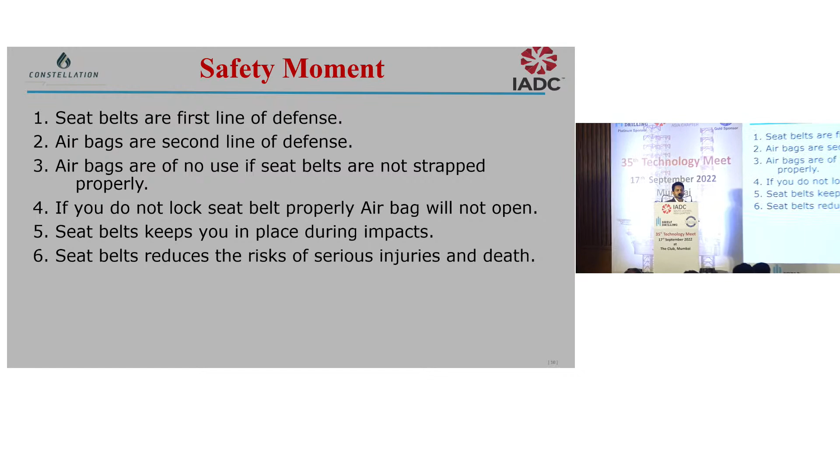Today's safety moment is use of rear seat belts in cars. I think this is current affairs nowadays, and this is a very important lesson also. So these are a few safety points. Safety belts are the first line of defense. This is very important. If you don't wear your seat belt, your airbags will not operate. So we have to always wear our rear seat belts also. That is more important.

If you do not lock it properly, your airbag will not operate. Most importantly, seat belts keep you in place during impacts. We all know the importance of seat belts now, but still we are hesitant to wear it. We have to make it a practice every day, like safety. Seat belts reduce the risk of serious injuries and deaths. There are a few videos also.

What happens in case of a collision, rear seat passengers are thrown at a force of 40 gravity, meaning 40 times the weight. If your weight is 80 kgs, it is almost 3200 kgs of weight. So you can imagine the hit.

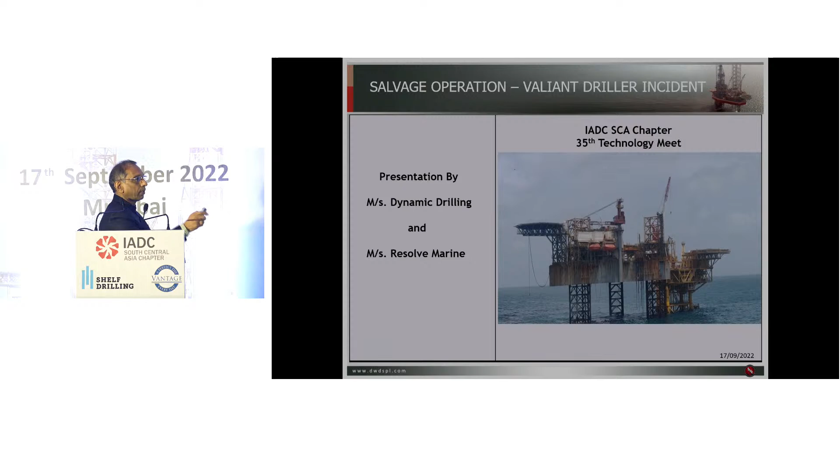Can I try from here or you can do that? Yeah, I'll go fast.

We got the warning of Cyclone Tauktae issued to the rig on 12th May 2021, and we took all the safety precautions to avoid these cyclonic adversities and keep the safety of our life as well as the asset.

Let me come straight to the 16th of May. The rig Valiant Driller continued working at N24 platform with the installation of Christmas tree up to 17:30 hours in the evening. We secured all the setback load on the derrick, equally distributed on the starboard and port side. The design derrick setback is 600 kips of setback load at 100 knots. We secured the rig floor, pressurized the gripper to 5000 psi, tightened all the bolts of tie-down clamps at the torque of 1200 foot-pound, and skidded the entire cantilever fully inside in a storm survival position. We secured everything in a safe mode and suspended our work.

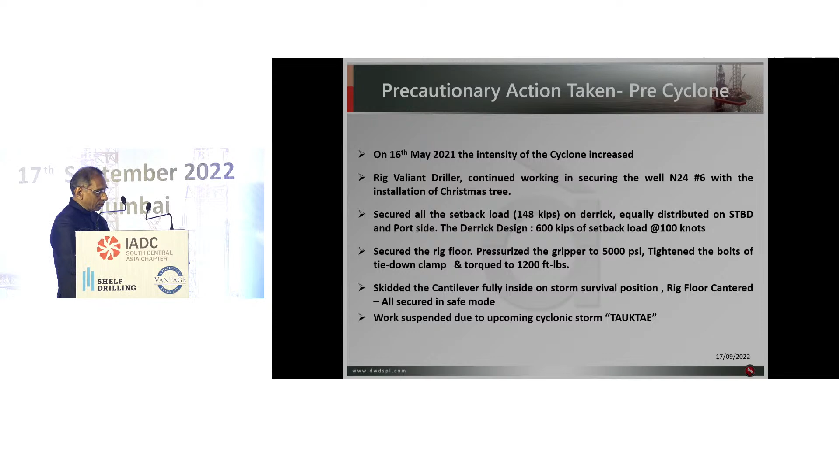17th May: the cyclone path changed towards the rig location with rapidly increasing wind speed intensity. At 10:30 hours the weather worsened. We reported wind speed of 100 to 105 knots, gusting to 120 knots, and swell of 9 to 10 meters. Everything happened in a very wrong way at 15:30 hours. The wind speed tremendously increased to 120 to 130 knots at a direction of 210 degrees. The sustained gust was plus 150 in a circulation direction, in a vortex effect, and such continuous gusting was not witnessed in the last 50 years.

The rig Valiant Driller got caught in the eye of the super cyclone, I can say, and the derrick structure, the transfer section, the rig floor, all the equipment -- it broke down the skid beam, which we had actually secured, and it fell down into the sea on the starboard side. Thanks to God, 62 personnel on board were safe. They mustered inside the accommodation.

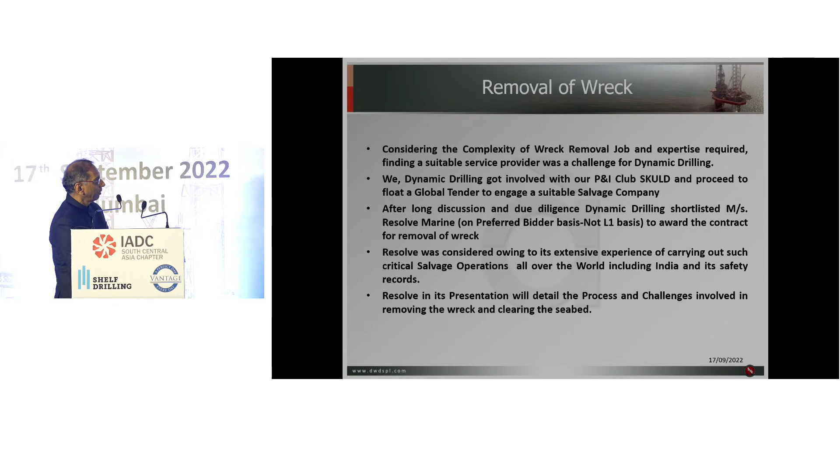Let me come to the last slide. Since my co-presenter Mr. Bagga is here, he will go through all those slides and presentations plus some videos. But before that, let me thank everybody. The project could not have been achieved without the full support and absolute cooperation from ONGC at all levels, including the MDT team -- we are very grateful for that. And there was excellent cooperation and support, and understanding, between Dynamic as well as Resolve during the entire wreck removal project.

We would also like to thank Resolve Marine for its efforts, and they agreed to present this case study here in this forum. Mr. Bagga has come from the US, and he was actively involved during the project, and he is heading the Resolve operation. I welcome Mr. Bagga, please.

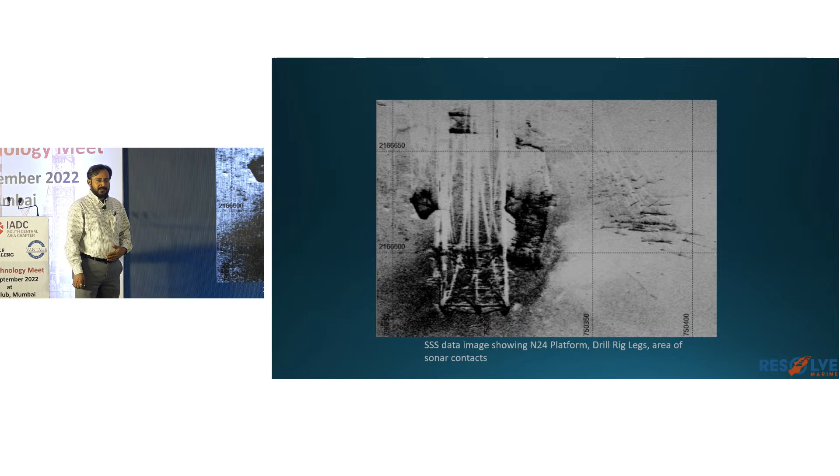So this is how the pictures were given to us. You can imagine this is the basis on which we had to start doing the salvage work. These are the three legs of the Valiant Driller, and this is the debris field, and this is the area where you have the N24 platform. Based on this sketch, our engineers were involved and came up with how it probably should look.

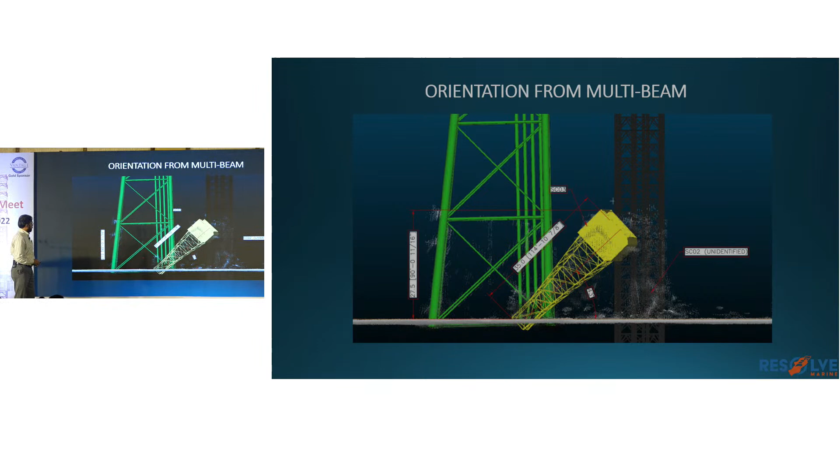Then we developed scenarios. One scenario was that part of it is embedded down into the mud seabed, and the other scenario, since the pictures and data were not very clear, was that it is probably broken into two like this. So we had scenario 1 and scenario 2, but we did not know for certain if this was exactly the situation.

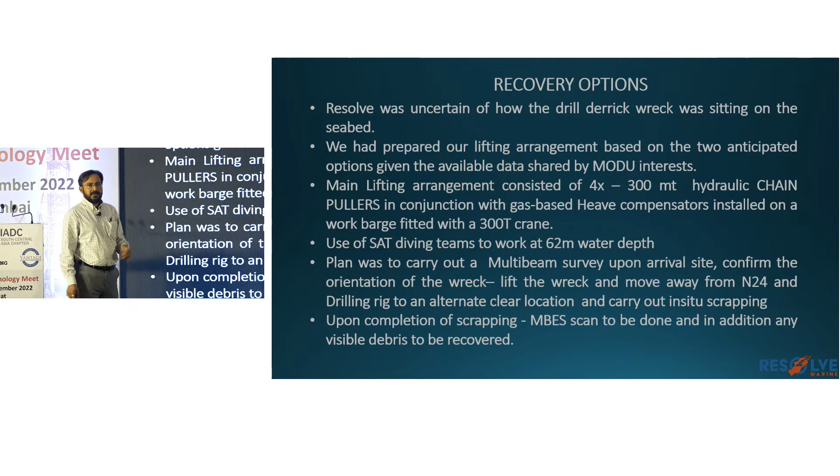We prepared our lifting arrangements based on the two anticipated options, scenario 1 and scenario 2. The main lifting arrangement was 4 into 300 metric ton hydraulic chain pullers, used in conjunction with gas-based heave compensators, which we will come back to later. This barge was also equipped with a 300-ton crane, and given the depth, we had to use saturation divers.

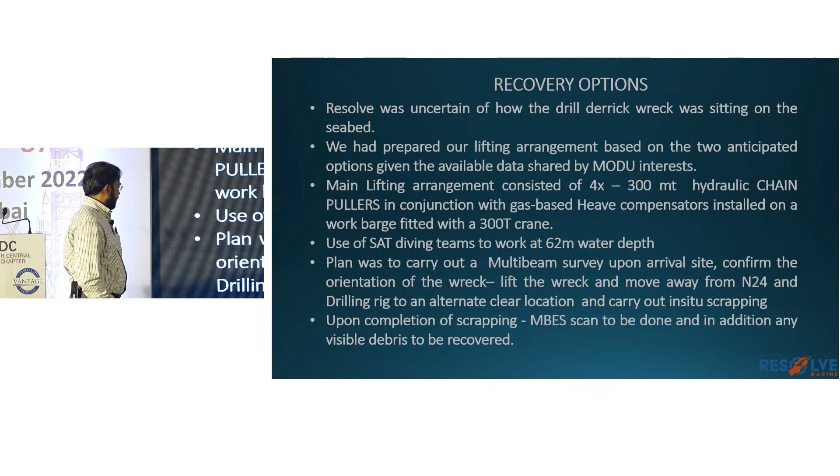If you work in these fields all the time, you know that visibility is a very big challenge on the west coast of India. So our idea was to do a multi-beam survey to find out the exact location and orientation of the wreck, and then proceed from there.

And depending on how we are lifting it, which chain needs to come up more, which area is heavier, which needs more support - all this can be organized based on the computers we use to operate all these chain pullers. Then there is a manual mode where you don't need all these hi-fi computers, and we can do completely manual.

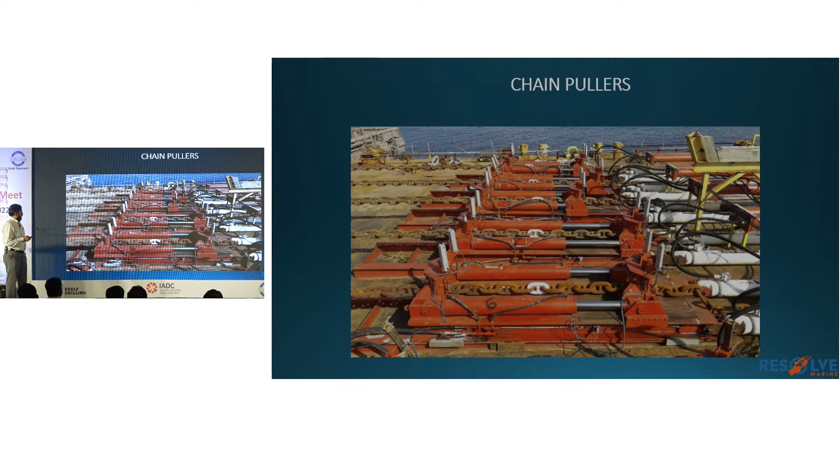This was the kind of lifting arrangement which we had planned for - that we would be lifting it, bringing it up using chain pullers and using the crane.

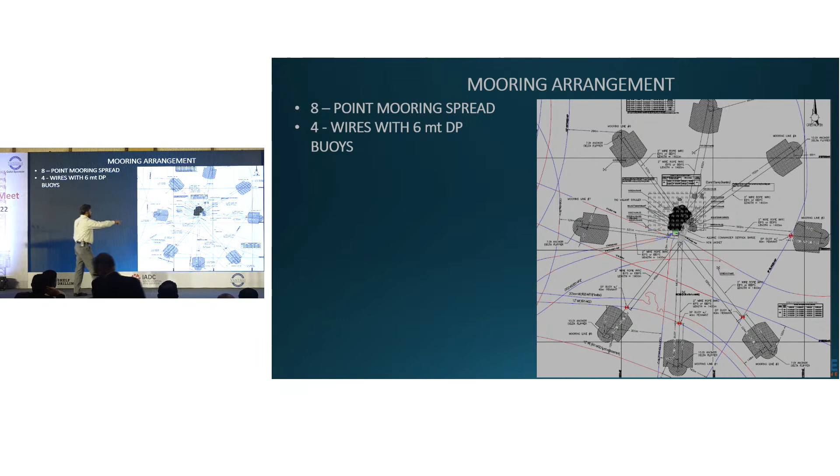And this is where the reality was - we got this mooring arrangement done, and you know better than me that all these red pipelines means naked pipelines. There is no, you can't touch them, you can't go near them, you have a serious problem. So this is the field we were supposed to be working in, and you see that area where you have N24 platform, and this is the debris field nearby.

This is how we had anticipated that we will be using 4 chain pullers along with the heave compensators. Along with our sat diving equipment and all that stuff, these are the pictures when the mobilization of the barge was being done in Abu Dhabi.

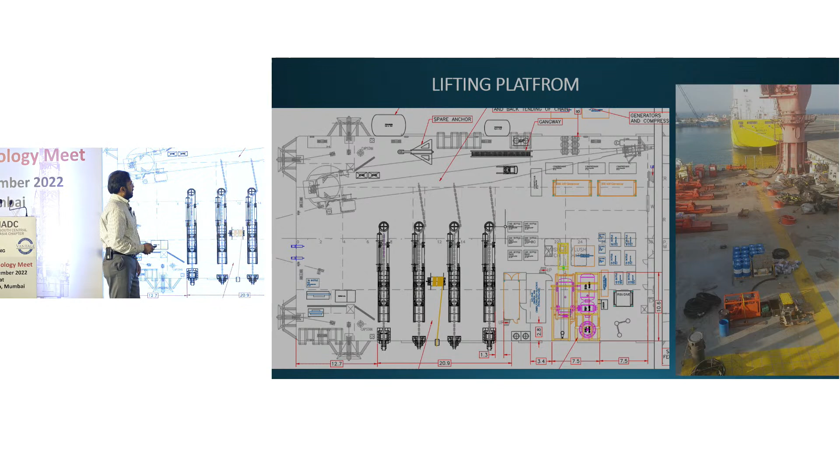Our marine spread comprised of a customized crane barge, 2 tugs, crew boats, material barge, and additional support vessels. We arrived in Mumbai in Feb 2022, this year. Our salvage team was an international team comprised of people from USA, UK, and you name it. We are an international company, so we call upon all of our talent whenever and wherever it is needed.

We had chain pullers, heave compensators, hot tap equipment. Hot tap equipment, if some of you may not know, is something we use to actually go in and remove the fuel or lubricants from the tanks, so that there is no pollution. And we had remotely controlled hydraulic saws, which we had flown in from Houston. They can go and cut the thing on their own. The idea being that you don't want stresses in the system - you don't want a diver to cut a particular item which is under tension or stress. It has a tendency to spring back and hurt the diver. So all these things were done.

And what happened when we were actually mobilizing - an Omicron variant hit at the mobilization stage. UAE and the Middle East shut down. India was very worried. All over the world, everyone was worried because of this new variant. Luckily, this turned out to be a minor variety, but we were under tremendous stress because we were mobilizing for the job and this problem started.

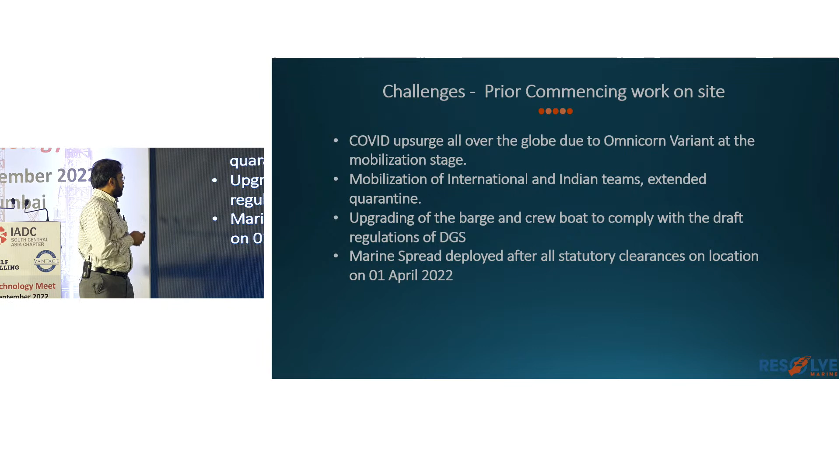And then, of course, when we came in here, there were some draft DGS regulations which came about and which we had to implement. We did that, and after all the statutory clearances - thanks to ONGC and everybody who was involved in helping us get those - our barge and the convoy went on the scene on 1st April.

So when we arrive on site, what do we find? We find that the orientation of the wreck is now different - it is not what we had anticipated and planned for. The wreck has broken into 3 pieces. We were thinking it might be folded over and we could still pick it up, but now the wreck's 3 pieces are at different locations. This was very challenging - the base section, weighing close to 240 metric tons, is lying approximately 1 meter away from the leg of N24 platform. This was a very, very challenging thing for us.

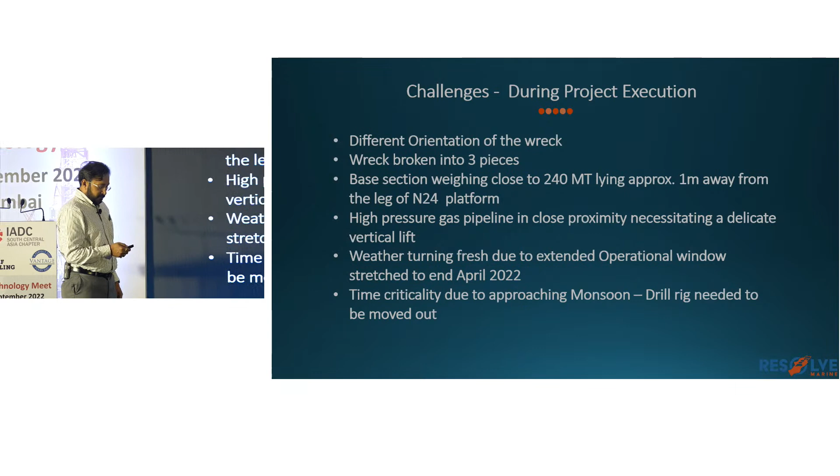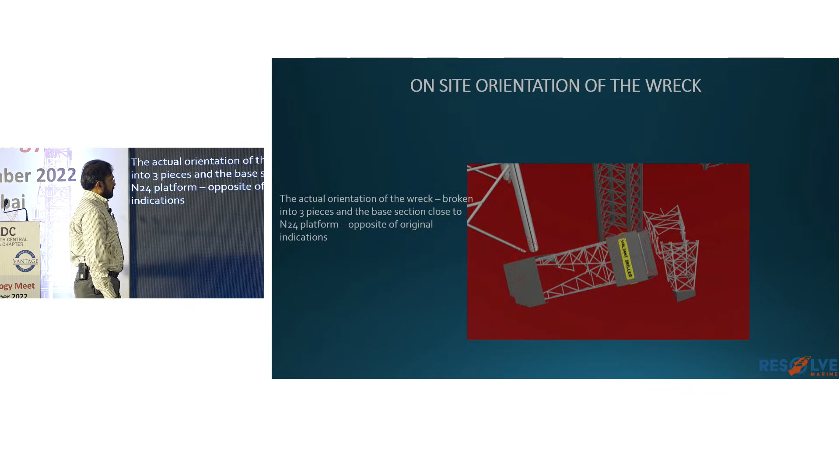And this is when our team came and they saw this. This is how the rig and the platform was sitting. This is what our engineers, after the survey, estimated how the thing is sitting. And these are the 3 pieces, and this is the base section here. This is the main one.

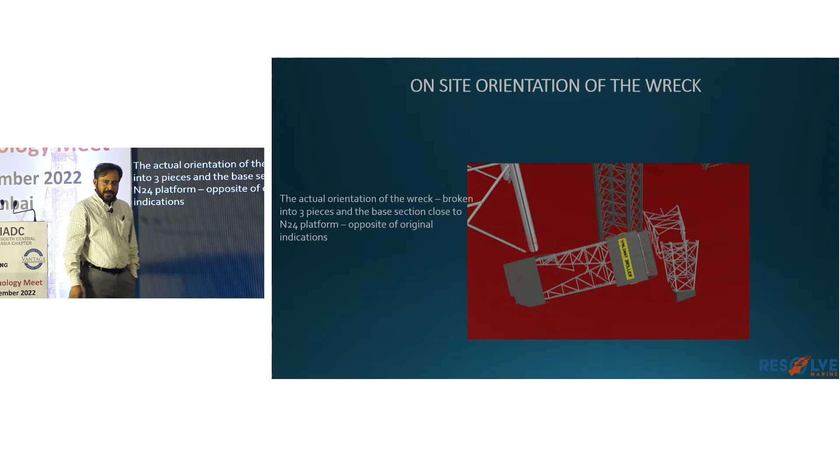This was opposite of the original thing we had actually been given. So we had to go back to the drawing board right there and then and come up with a plan for what we need to do.

So you can see this is a schematic diagram, how the sections are sitting next to the N24 platform. You can see that if you're looking from the top, you can't make out that there is any gap. But we knew that there is a very, very minor gap, about a meter between the leg. Very lucky that N24 got unscathed from this one.

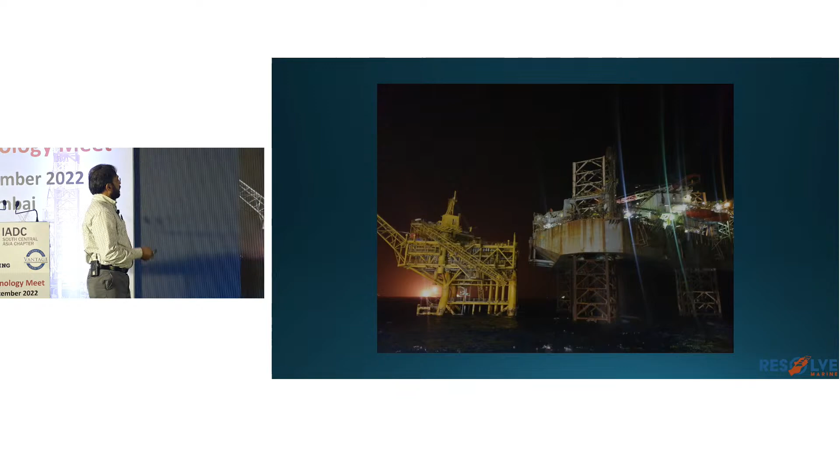This is the pictures, okay. This is our guys down below actually checking. This is how it looks like. And these are the 4. This is how close the barge is. You can see this is the Vantage driller N24 and the barge.

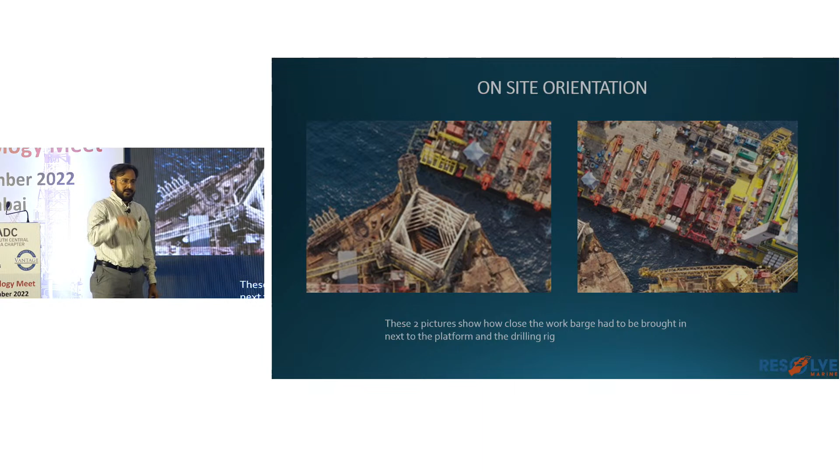This is, you can see how close we were there. These 2 pictures represent how close we had to go in because we had to go for a vertical lift. And that means we could not grab onto it and move it because of the oil pipe, this high pressure gas pipeline, which was very critical.

And I can tell you, we spent a lot of sleepless nights at that particular moment. And we had, courtesy ONGC's cooperation with them, kept the well alive for most of the time, except during that particular lift, which was for about 8 hours. The drilling rig was about 17 feet.

We were about 5 meters away, and we actually closed the well for approximately 8 hours, and the lift was successful. So this is a small video which shows you how the divers were going, carrying out a dry run.

This is what a bell looks like. Maybe most of you have seen that.

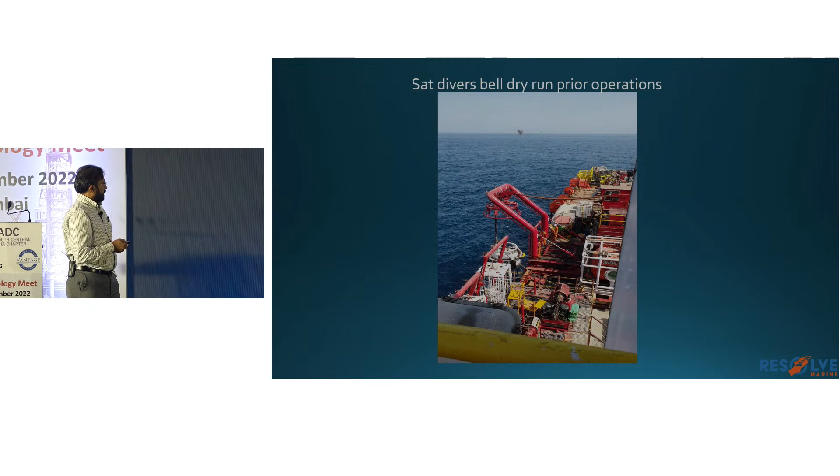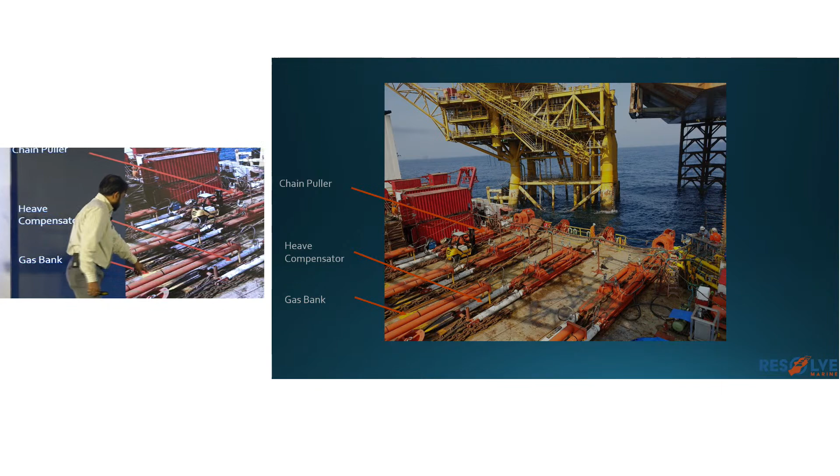If you see, the interesting thing here is this chain puller actually slides on this frame. There is a frame there. The chain puller moves on the frame, and the chain puller is hooked on at the back with these heave compensators, so the whole assembly is actually sliding on the frame. These heave compensators are in turn, this is called a whelp, where the heave compensators have wires hooked onto a fixed point.

So let me see if we can show you the video. You can see here, these heave compensators with a wire are connected here. These are the gas banks.

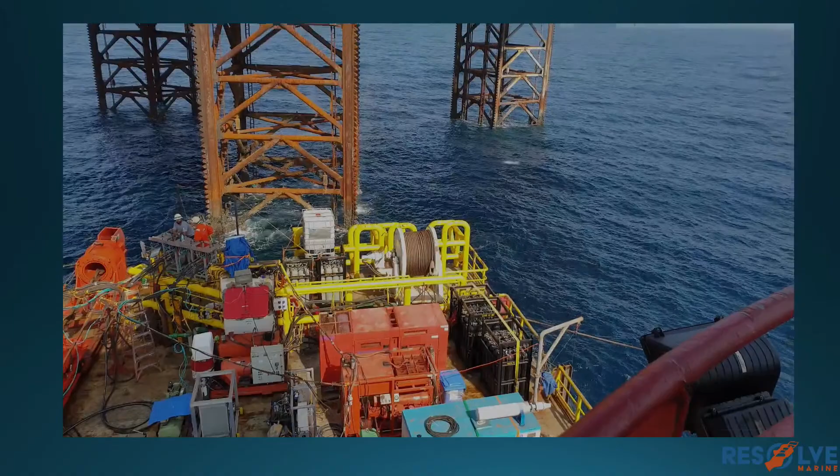I will actually show you a better quality video. Let's move on to this. This is a chain puller, how the chain puller works. Let's see if we can show this video.

These are the heave compensators. You can see they have been extended, and they actually move along with the swell of the barge. So this is moving on quickly, partially buried.

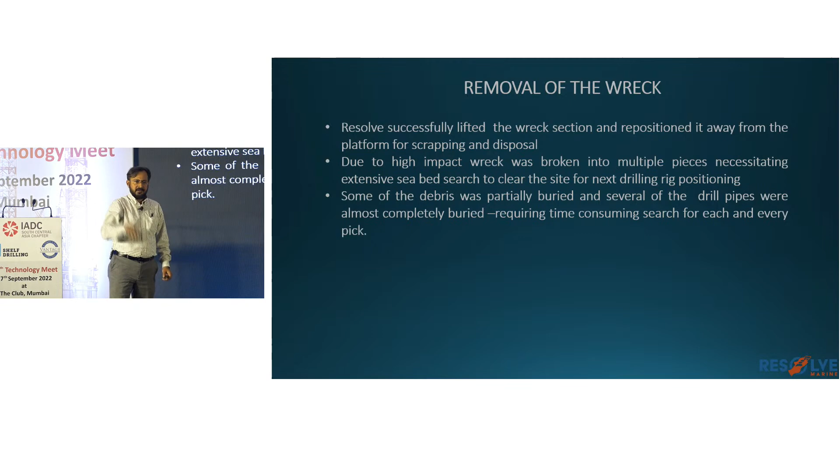The pipes were like darts in a dartboard in a different area. So we'll just quickly show you this video. Again, I don't think the video is very good for some reason, but this is how we are picking up.

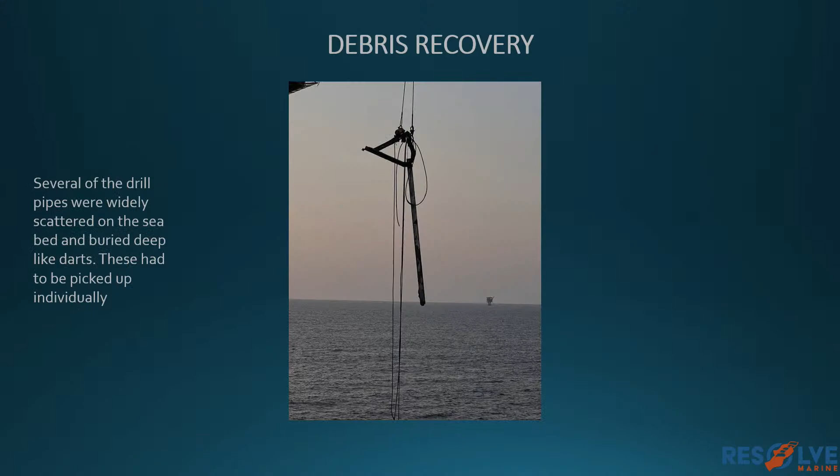We had to actually go and individually pick each and every pipe, and that was time consuming. Visibility was poor, divers had to go and look for everything. Some of these things cannot be picked up by ROVs, so we had to do this visually.

This is how we maintained how much weight we have picked up, what we did. This is a grid we prepared. So this is the Valiant driller, the triangle, 3 legs, and you can see this is the process what we are trying to show you.

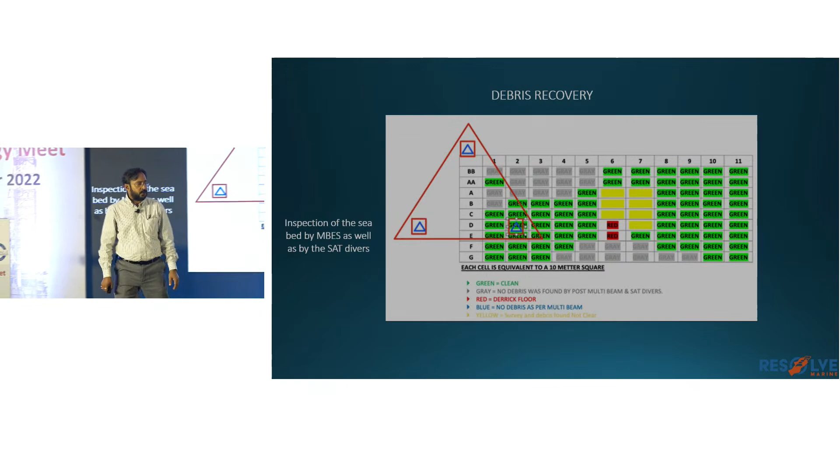Green means it is clean, we have done whatever we needed to do, and gray means we did search with the divers and we did search with the MBES, nothing was found. Red is the one which is derrick floor. Blue means no debris, but still we have to look. Yellow means survey and debris found, not yet clear. Each grid was 10 meters square, so this was a methodical way of going about making sure that everything is clean.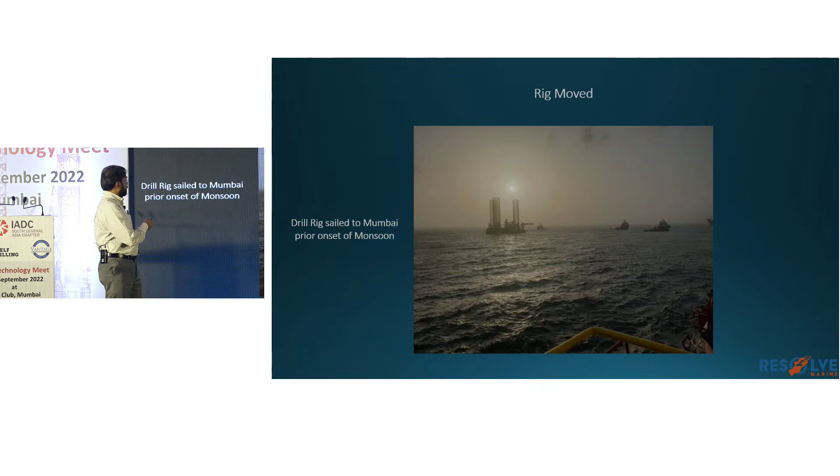One of the things I started with in the beginning, and I want to emphasize it, we are a foreign company, we came here to do work. We would not have succeeded in this endeavor had it not been for excellent cooperation from ONGC, right from the bottom to the top, everybody. I must thank you from my heart for what you guys have done for us.

The important thing was everybody had a belief, yes it can be done, it will be done. There were so many challenging moments, but everybody kept calm. Nobody put pressure on us, and we actually did it. There was a little bit of delay because of the weather, but it happened.

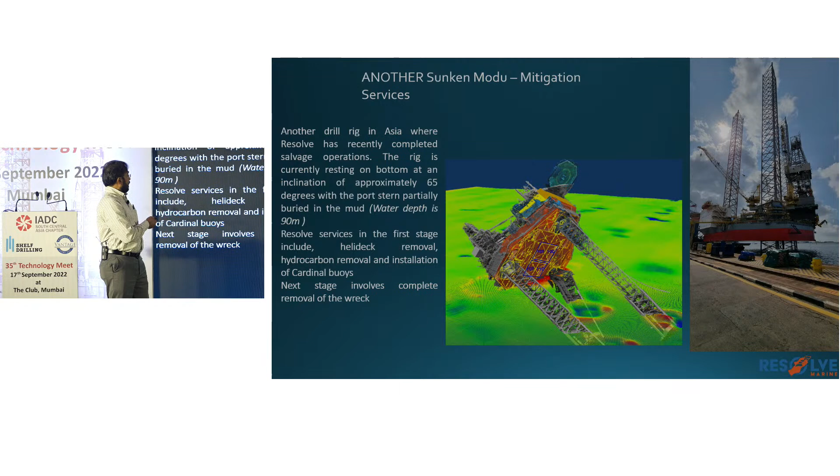So let me show you now, this is another one, I have just finished this. We're just coming back from there. This is another MODU, and we have done the helideck removal and the fuel removal from the tanks. You can see the tanks here. This is how another one, MODU, looks like. Yes, it punched through, and it toppled and went over. It's about a 6-year-old MODU.

So we are now working on it, we just finished part 1.

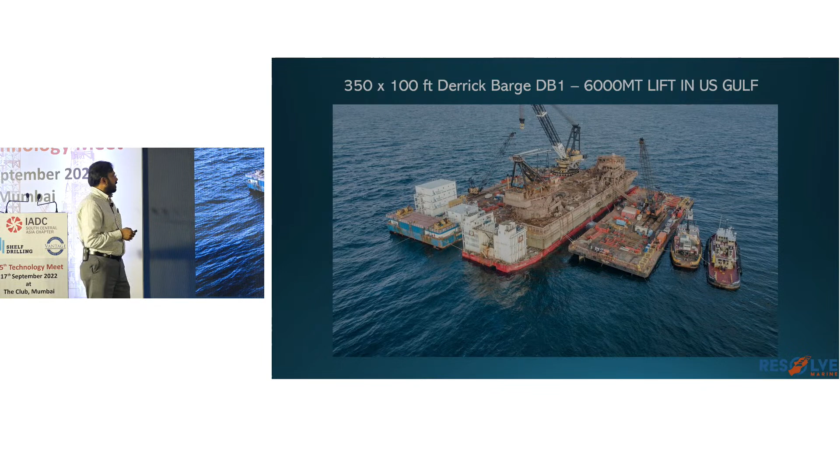And this is what I wanted to show you. This tells you, actually this is a better quality video, how a chain puller system with heave compensator works. It's not related to this project, but it gives you an insight on how the system works. So this is a derrick barge. If you see the complete one, this is a 6,000 metric ton lift, the highest lifted in the United States Gulf, which Resolve did.

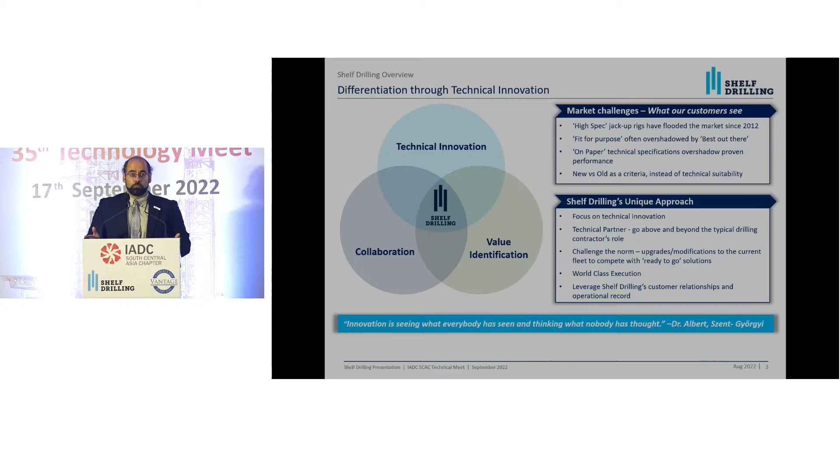Eventually, a lot of the operators, especially those not truly aligned with what they're trying to achieve, started going for what's the best out there, instead of what is actually fit for purpose for their operation. Technical specifications that looked great on paper started overshadowing proven performance. A lot of operators started giving contracts to new drillers who had never drilled before but had the latest rig right out of the shipyard, versus people who actually knew what they were doing. New versus old also became a criteria - we saw different people around the world introducing age limits, a lot of which did not make sense for their actual operation.

So there's two ways to fight these problems. One is you join the problem and start ordering new rigs. The other is to actually take a step back and think about what we're trying to do. Our goal is to drill wells - sometimes to erect platforms, sometimes to abandon those platforms - but that's the key role we play in the value chain. If we can focus on technical innovation with existing assets and go above and beyond just being a drilling contractor on a day rate trying to do the best possible and then leave - if we can truly become a technical partner, understand what our customers and operators really want to achieve, and help them find solutions to those problems - that will become a differentiator for us.

So today I'll give two examples of such technical innovations that we've come up with in the last few years to really help key operators solve particular problems they had.

The first one is in the Gulf of Thailand. Some of you may know that in Thailand, the well economics are very short cycle - wells only flow for a couple of years. So you have to drill very fast, and then you end up with a whole bunch of wells and platforms that need to be P&A'd, or asset retirement as they call it. A lot of the operators there have commitments to the government - since they are drilling sometimes 500, 600, 700 wells in a year, that adds up really quickly. By the end of the concession, they need to retire all those assets - that's part of the commitment of getting the concession.

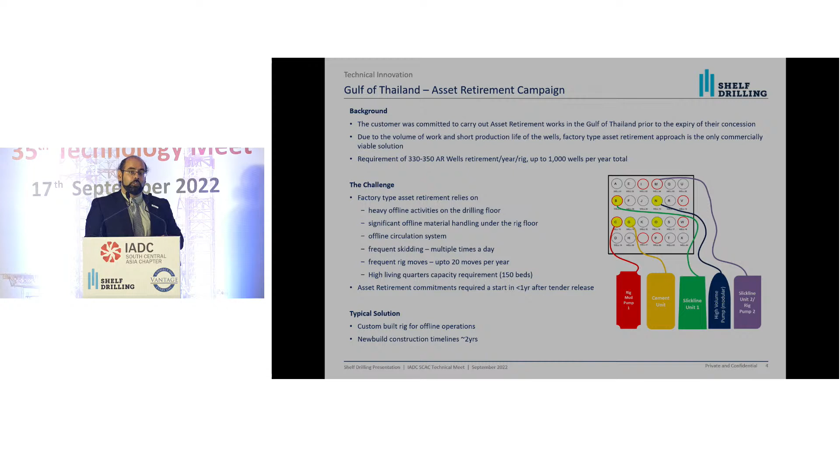So that schematic over there is the number of offline activities that are going on at any point of time on a platform. These are multi-slot platforms, so they have a lot of slots very close to each other, but you can have up to 5 different wells being worked on at any point of time. That's the level of offline work they were looking at.

So our solution is, we understand asset retirement. We've done it in the past. We get what they're trying to achieve. So we set up a workshop with them and started going through step by step all the aspects that they need, what are the capabilities they need, what is the equipment they would need, what are the people they would need. And we came up with a light version that you can retrofit on an existing rig.

So what did that mean? We managed to retain largely the rig floor infrastructure. So you kept the same derrick, but you completely redesigned the fingerboards. We were able to, they needed a bed space of up to 150 at times. So we had to upgrade all the living quarters to get up to 150, but we were able to retain our existing accommodation block and do that.

In a way, it's like turning the rig around in what it's designed to do. Typical jackup rigs are designed to do fewer marine operations, so fewer rig moves and skidding, and more hardcore drilling. This is turning it around. The drilling's not that hard. You're not really drilling, you're doing asset retirement, but you're skidding and rig moving all the time. And that was the challenge where we wanted to understand that our kit could take it.

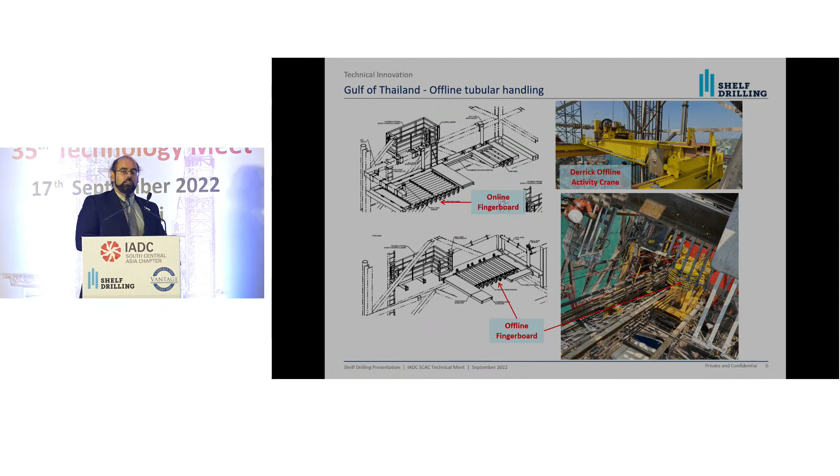To handle all of these, we have an offline activity crane up there, and you can see a picture of the actual fingerboards from that level. The fingerboards are at two different levels, and on the elevation and plan view, they split from each other depending on if you want to do tubing or casing.

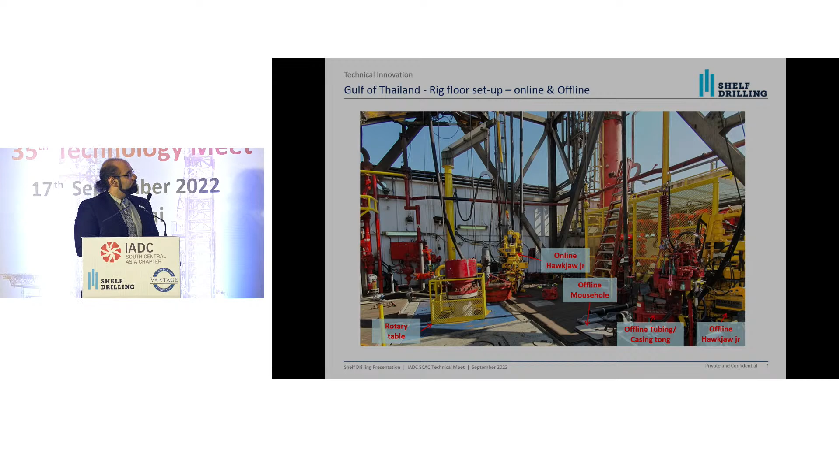All of this also involves a lot of work on the platform because you're connected to sometimes 5 wells at the same time. So we had dedicated cranes in what's called the moon pool area, under the rig floor, that could handle and sometimes keel haul, and they're actually capable of swinging outside the cantilever envelope, so you can bring stuff from outside the rig or straight from the boat onto the platform and also take it out. So you could be rigging up BOPs and everything offline and setting up wireline and slickline operations completely offline on a different well.

So that's on the asset retirement side. Let's go on the complete opposite end of the spectrum and actually build platforms.

Here's the next challenge that we got, and this was from a customer in Angola. In Angola, as you'd probably expect, the lifting cost is very high because of the remote location and relatively poor infrastructure, but they are oil and gas rich reservoirs. So the customer wanted to develop a marginal field, but if you set up a regular jacket or platform and pipe it up from shore, it costs too much, close to almost $300 million.

What they were trying to do is come up with a light version, what they called a stacked template structure or STS, which is a standalone jacket you install relatively close to existing larger infrastructure or platforms, and then you put in subsea pipeline and power cables from the larger infrastructure. So this thing is only connected by 2 subsea lines and a power cable to the larger infrastructure. It pumps out all the oil and gas to the larger infrastructure, and then you use your existing setup to send it to shore.

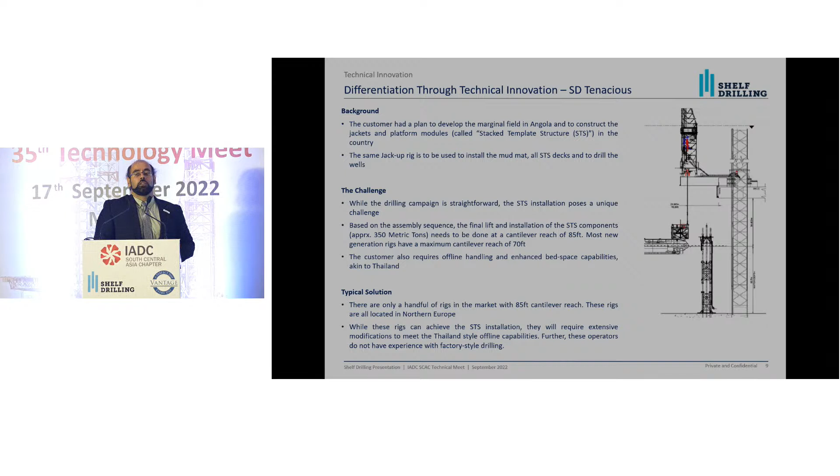So they wanted to do this with a rig. The challenge they initially posed us was, can we do this with a jackup rig that will then eventually go on and drill that platform? Sounds great, but here's the challenge.

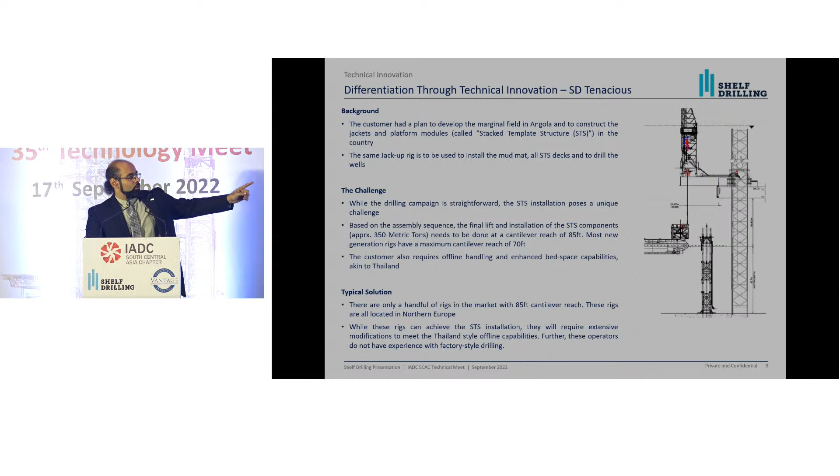As you can see in the drawing, you have a mud mat, that's easy. You have a couple of structures subsea, that's easy. You have a drill deck module on top already installed in this drawing, that's easy. Then comes the hard part: the big production deck on top, that's around a 350-ton lift. By that time, you already have structure coming out of the water right next to your hull. So you still need to be far enough that eventually, after drilling, you can jack up and leave.

To skid out beyond this existing structure, pick up this heavy lift, and skid back in, you need to make a 350-ton lift at an 85-foot cantilever extension. And that's the problem, because there are only 13 rigs in the world that can do that, and they are all in Northern Europe, mainly Norway. So you're pretty much down to CJ70s or Gorilla class rigs. That was the original challenge they posed.

They were trying to avoid the cost and pain of getting a heavy lift barge. But if someone from the North Sea quotes you $400,000 per day for a jackup, the point is kind of lost. So they asked us, can you guys do something about this? And we were like, let's think about it.

We came up with a couple of different solutions. First was using rig ups. We had a 75-foot rig, a BMC 375, and we said, why do we need to pick it up vertically from the rotary table? Can we do an offset? We thought about it, worked through it, but it didn't work out because eventually you need drill pipe.

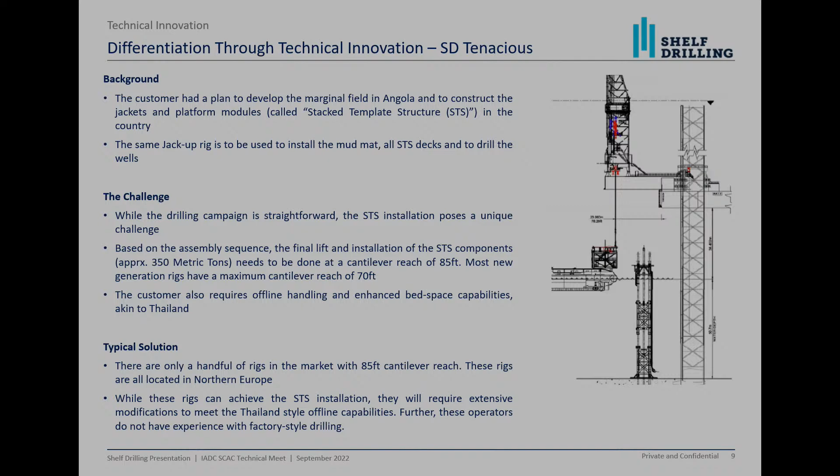We worked on that, and along with it we also did all the offline handling upgrades I mentioned for asset retirement, so they can drill this faster. What was supposed to be a 6-month AFE for this STS drilling, we're hoping to achieve in 4 to 4.5 months because of all the offline upgrades.

No one thought this could be done, and eventually we did it. From a structural engineering point of view, the actual cantilever deflection at 85 feet out, when you pick this thing up, is only 6 inches. Pretty cool.

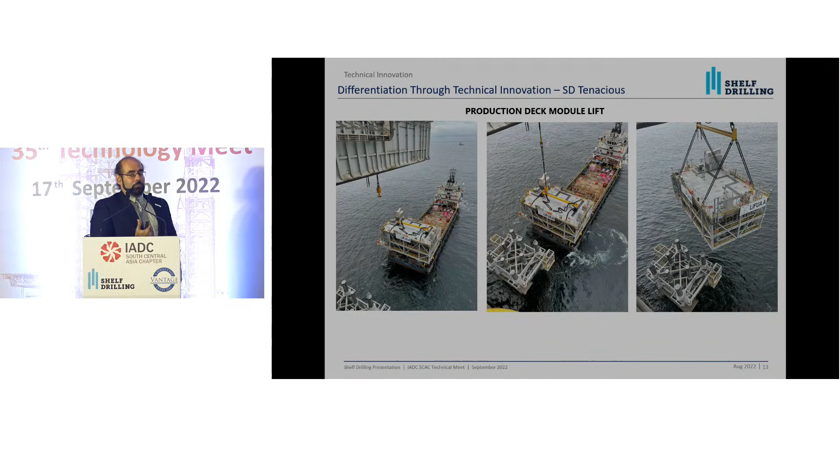That's us making the final lift. That's me taking those pictures last Friday. I wish I had a video, but it only happened 8 days back, so they haven't put the videos together yet. It was 9:30 a.m., 8 days back, when we picked up 351.4 tons, and we skidded it in and landed it.

Thank you. Just to close out, I think I've managed to catch us up on time. For us, these are not one-offs. At Shelf Drilling, we think innovation like this is part of our business strategy.

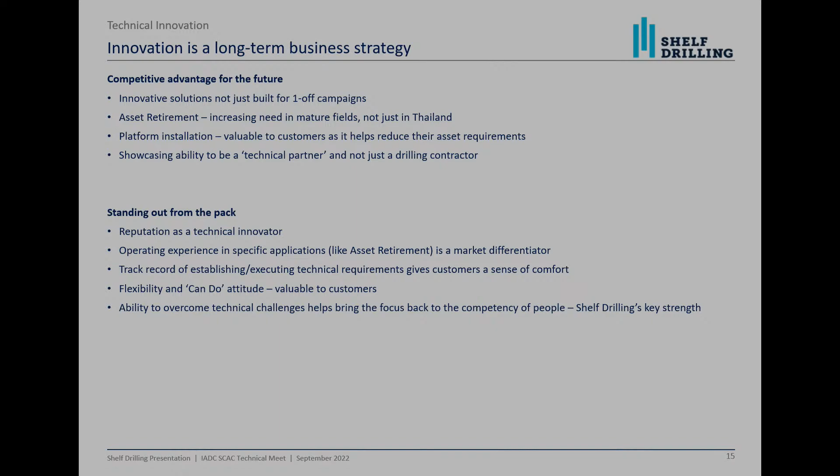There's a finite number of rigs in the world. No one has built anything new in the last 5 years, and no one has cut steel in the last 6 months either. So even if you decide to do it now, you're at least 3 years away from a new build. What we have is what we have to work with. And if we can innovate our way through problems, we can find solutions and go back to our core strength, which is our people. Give them the tools, give them the rig they need to succeed, and they'll do a great job. Thank you.

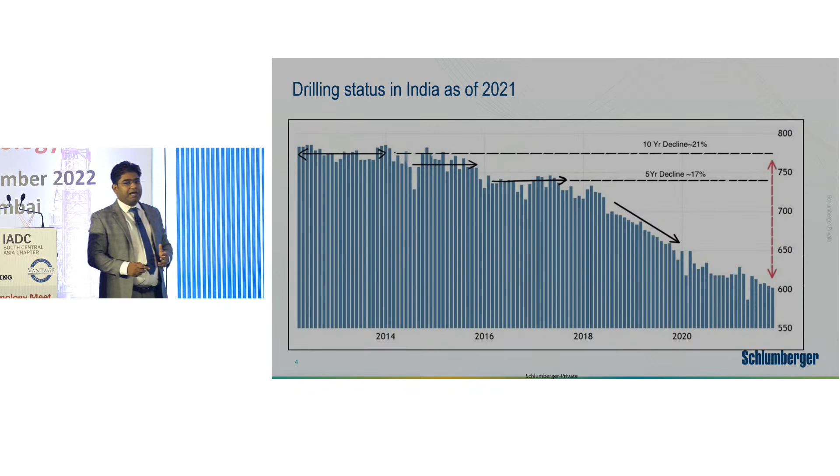We are truly looking forward to new exploration, but it is very important for us today to ensure the cycle time and efficiency are being improved in the drilling process.

Overall in India, we have various challenges out there: circulation losses, back reaming, lost in hole, casing getting floated, wiper trip, hole collapse in the various fields we are looking into. In directional casing while drilling, all these are considered non-productive time, which in day-to-day drilling activities is fair.

So for those who are not well familiar with casing while drilling, it is just a process in which the drill string is replaced by a casing, and the entire BHA is somewhat locked on the bottom. The directional BHA is locked on the bottom, it does its directional part, and once we are at TD, this BHA is tripped out, and we are not using any more drill pipe during the drilling process.

This is a small drill lock assembly video to show you exactly what happens with the BHA to casing. The string arrives at the rig preloaded in the shoe joint. The BHA is made up to the drill lock assembly and run to the bottom of the hole on the casing string. The conductor can be drilled out with the casing drilling BHA.

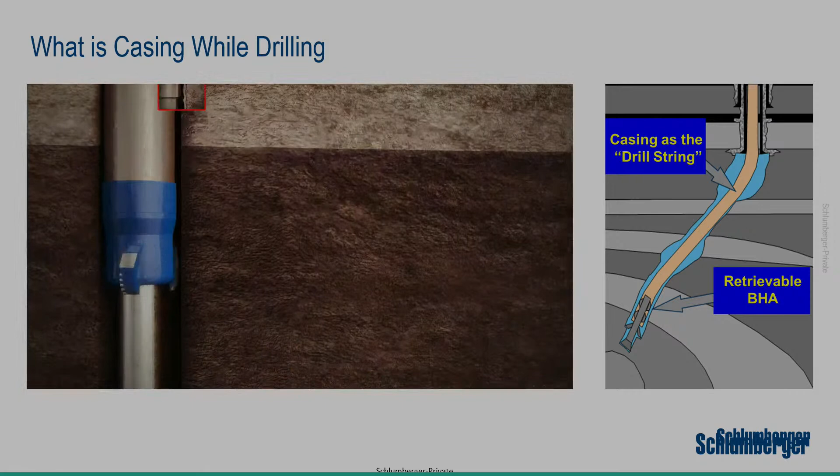Both the casing and mud motor rotate the bit and under-reamer to drill the interval. The narrow annulus creates high annular velocity for better hole cleaning. Low rheology muds and lower pump rates are used to manage ECDs. The casing grinds and smears the cuttings into the borehole wall to minimize fluid invasion into the formation, improving wellbore stability and reducing losses, minimizing risk of lost in hole, improving borehole quality, and providing better cement placement.

After drilling to the kickoff point, the mud motor is oriented to steer the well. Complex 3D well paths can be drilled with large diameter casing using a combination of directional, MWD and LWD tools. After reaching total depth, the annulus is circulated clean.

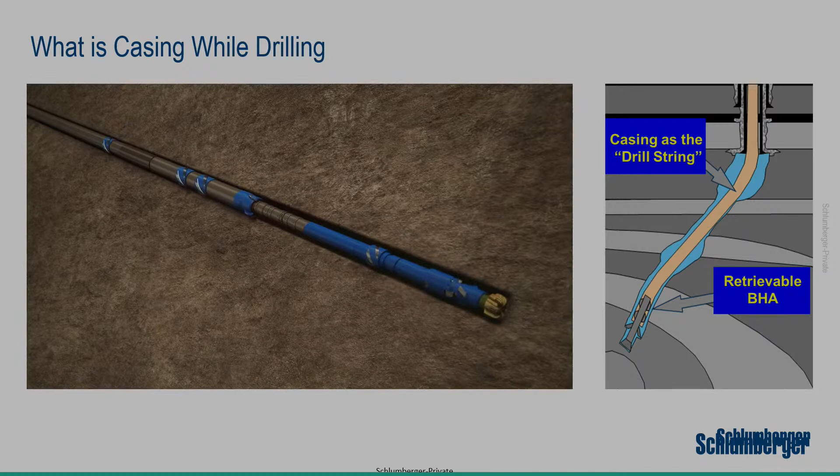A release tool is pumped downhole to unlock the BHA from the casing. The casing is slid over the BHA to secure the under-reamed hole and cover the BHA. The casing can also be spaced out and hung from the wellhead. The BHA is pulled to surface through the casing on a retrieval tool, eliminating stuck pipe due to key seating,

instability, or differential sticking. Mud cake is not stripped by stabilizer or BHA passage, and the open bypass in the drill lock assembly reduces swab and surge as the BHA is tripped.

After the BHA is retrieved, the cement head is made up to the casing string, and the well is conditioned. The cement is pumped and followed by the cement plug. The plug reaches its full-bore receptacle in the casing shoe, where it locks and seals to prevent cement U-tube.

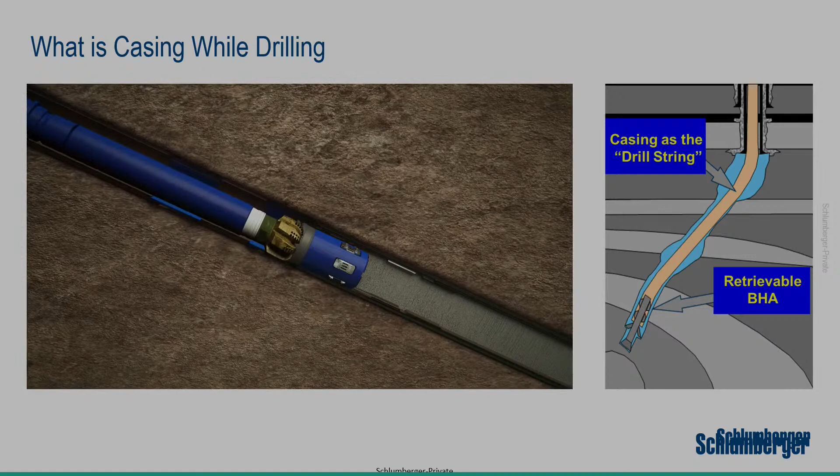The cement plug can be drilled out with the cement in the shoe track without the need for a dedicated run. The TD Direct CD service saves drilling time and associated costs.

Primarily this technology is fairly not new. It has been introduced in 1998. The first well test was being done, and after that we have been drilling globally at all places. So we will see that our presence is all over the globe, and right now with support of ONGC we

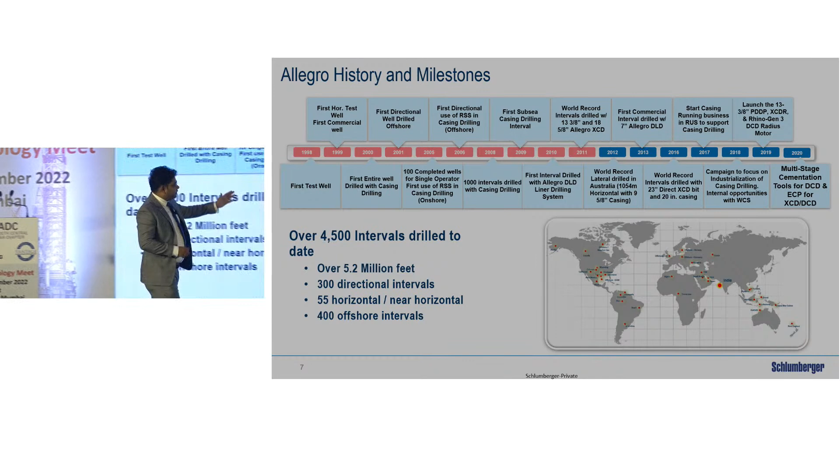have managed to do the unified non-directional casing well drilling. At a period of time around 2012, '13, '16, there were a number of records being set, where 13 3/8 directional casing well drilling set a world record. And that's where we say that this is a robust technology ready to do more jobs in India.

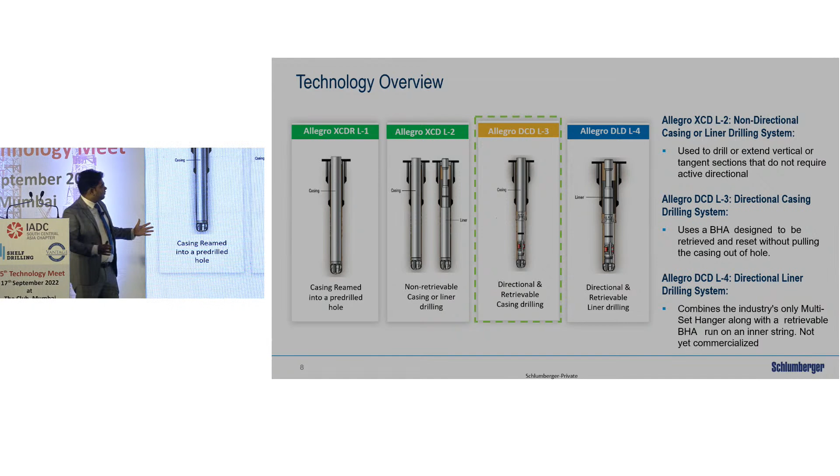However, there are various levels of directional casing well drilling. I won't take our time, but this is the level I will be talking about: directional casing well drilling, which means the flat time of running the casing is completely eradicated. Every foot that we are drilling is cased, and we have secured the well.

However, I think everybody will echo my thought that all the contractors and drilling operators have seen drilling problems caused due to various factors, which is non-productive time: when the pumps have issues, when we have well instability issues, when we are talking about poor ROPs and all those things.

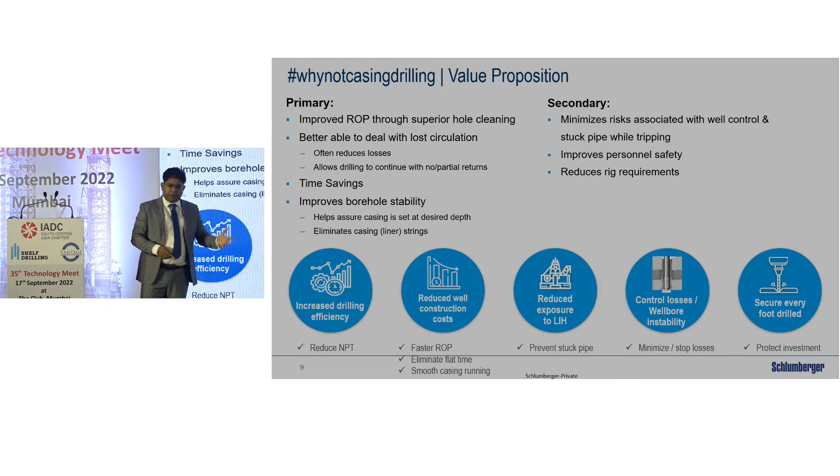When we talk about casing well drilling, we are handling the loss circulation by what's called the smearing effect or plastering effect. Actually, that reduces the losses to a certain extent, not completely though. There is time saving where the flat time of casing running has completely gone, because the moment you have directional drilling, you have also cased the well at the same time.

Every foot that you are drilling has already been cased. There have been instances where we could see a complete casing string being removed. If there is a 4 CP plan, it could turn to 3 CP. We can talk about it, and that is where we have to think and work upon that.

Again, from a personnel safety standpoint, we see fewer people. We don't want people on the monkey board. The casings are being made up, run in, and we keep on drilling again and again.

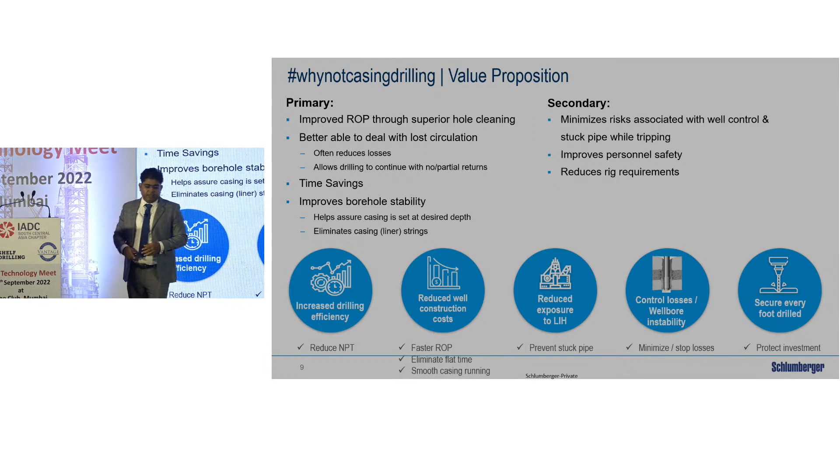And the rig requirements are also reduced. When I say rig requirements are reduced, that means when we have a very thin annular gap, the flow rate required in a specific drilling is lesser. Suppose in a 13 3/8-inch casing, when we are drilling a 17.5-inch hole, we require 800 gallons per minute. But the moment we are lowering a casing, and we have a very thin annular gap, we will not be able to pump that high. So we are coming down to 400 gallons per minute. So the pumps are not being pushed to their limits, and they're not down.

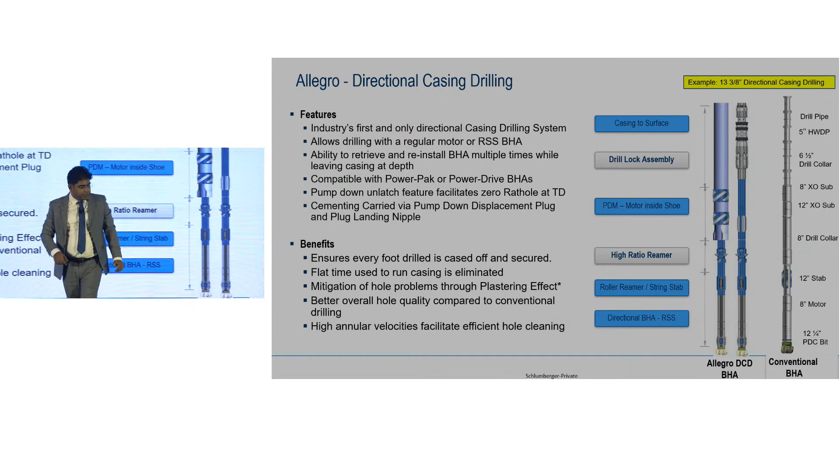Again, this is how casing while drilling looks like. What we do is the entire casing is pretty much being locked. The BHA is locked inside the casing, and it is kind of a replacement to the conventional BHA. So that is how it will be looking like.

And most importantly, this is what I would like to show you: here, when we have a 12.25-inch bit, we can incorporate MWD or a motor. We have MWD, LWD logs. We have an under reamer placed right now, and the entire assembly is fairly locked inside the casing, which is retrieved toward the later end. So that is what it looks like.

On the top, what you will look into is a casing shoe joint, where you will only be looking at the shoe joint. A lot of preparation goes into that. However, the BHAs can be further looked at as RSS or a mud motor.

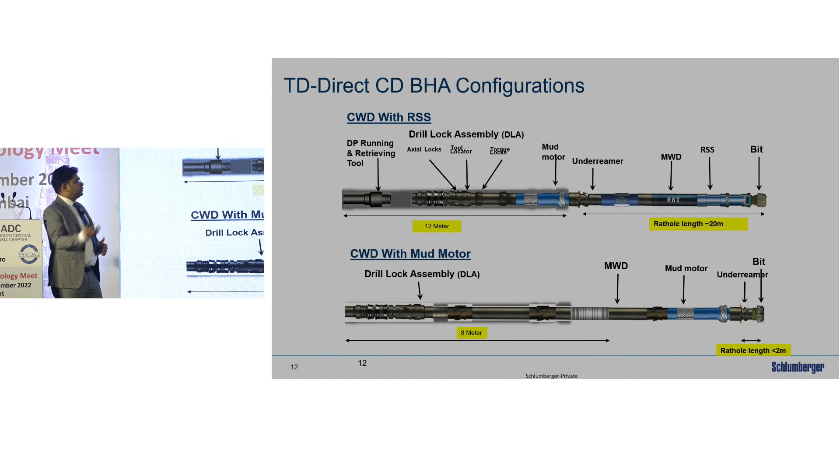The only difference when it comes to putting a motor or an RSS is the placement of the under reamer. When we are using a mud motor, the reamer has to be just above the bit, because when we are sliding, we need that rotary action. Whereas with the RSS, it will be placed somewhere down here, and that's where we have a rat hole of 20 meters. Never mind, this rat hole can be further swallowed when we have a reamer shoe with PDC cutters on its periphery. So again, a rat hole is not really an issue.

So the point is, the only thing we need to understand is that once the casing is lowered, wireline cannot be done. So whatever data we are having will be a real-time log. Whatever logging while drilling tools we have, those are the ones who can help us out.

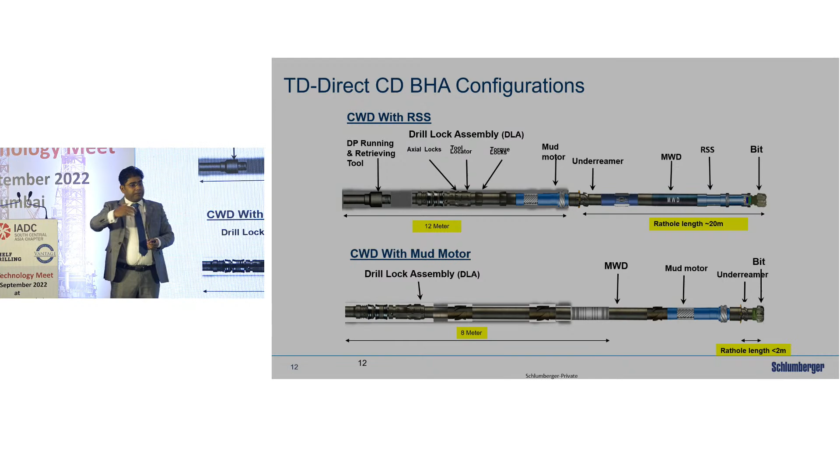That's it. And again, the cuttings that will be generated and will be coming on the shaker will be kind of a paste, like a slurry. So we have to understand that the shaker will not be having a lot of cuttings that can be evaluated by the geologist that easily. But having a fair idea about the environment, and knowing what we are drilling, like Seven Sisters and whatnot, that is where we need to know there will be limitations. Again, the cuttings will be fairly coming at least 10 to 15% less because of the plastering effect. A lot of cuttings will be plastered, and that's where the losses and seepage are somewhat controlled.

Again, I would say every well that we put our hands on cannot be feasible for casing while drilling. No, never. It could be 50%, 60%.

Like this, we have to run different parameters. We understand what kind of torque will be coming at TD, what kind of casing connections are there, whether it will be able to withstand that torque, and we keep a buffer of around 20%. So if this line crosses the red line out there, we will not take up the job to do it.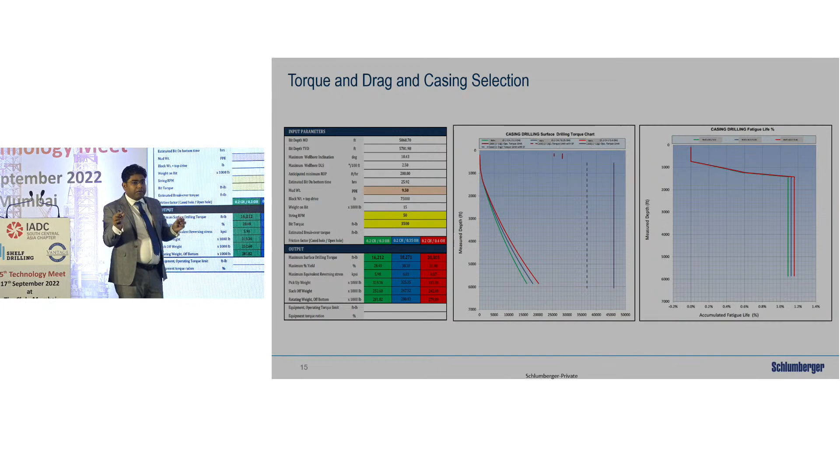Similarly, for ECD management, the flow rate has to be ensured with a very low, narrow gap. We cannot pump too high, or the formation gets damaged. And again, it's very important that casing drilling fatigue has to be looked into. This is primarily important because when doing a directional well, the casing goes through cyclic loading of compression and tension. Any casing can be rotated a certain number of times based on the SN curve, so that has to be seen, and if it passes that limit, we cannot do it.

However, if the casing while drilling job is feasible and we can do it, definitely it brings savings to the table. But if it is not feasible, definitely not. So in order to improve the cycle time and efficiency, this technology first has to pass all the analysis.

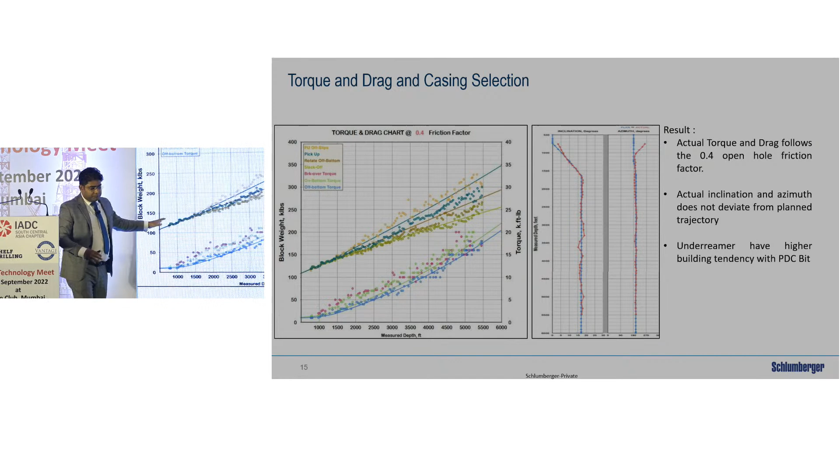This is a real job that I did back in Malaysia. What we do is take whatever data is there and start putting all our torque into that torque and drag chart to see exactly where we are. We are plotting all the directional surveys there, and what we've seen is that though in open hole we expect about 0.25 to 0.3 friction factor, it generally comes down to 0.4 open hole friction factor. So that is where the torque and drag has to be looked into.

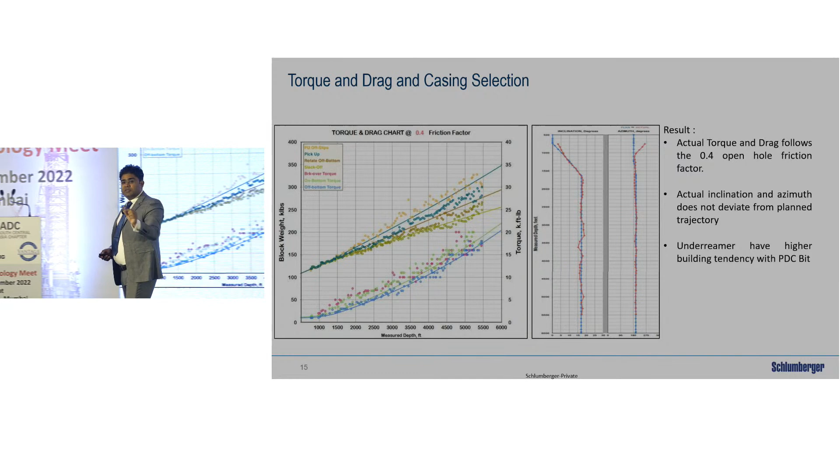Actual inclination and azimuth do not deviate much from the plan, so we are able to catch up with the directional well. Underreamers have a higher building tendency when using PDC bit type cutters, which is a newer technology, so that is something we also have to take into consideration.

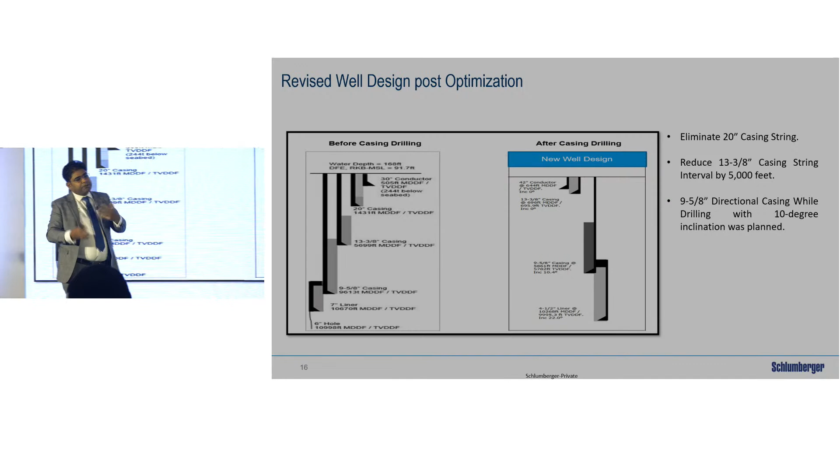But all those practices come from when we are on the drawing board discussing all these fronts. There is a lot of preparation that has to be done in the background. It's not an easy job like a vertical well.

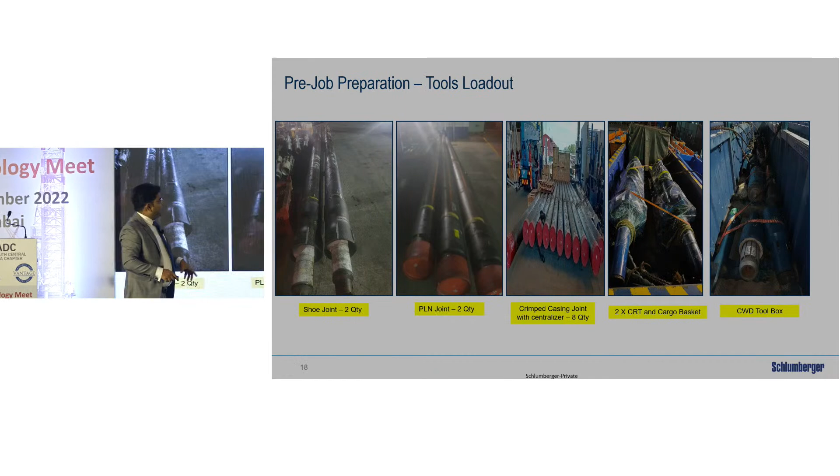Centralizer installation has to be done. We have to bring all the casings, at least the bottom part, where good cementing is required around the casing, so we put the centralizer, crimp it on, and send it across so we have 360-degree cementing around it. Again, for a BTC casing, we have to put in the MLT rings in order to increase the torque rating. So these are the additional work items that have to be done.

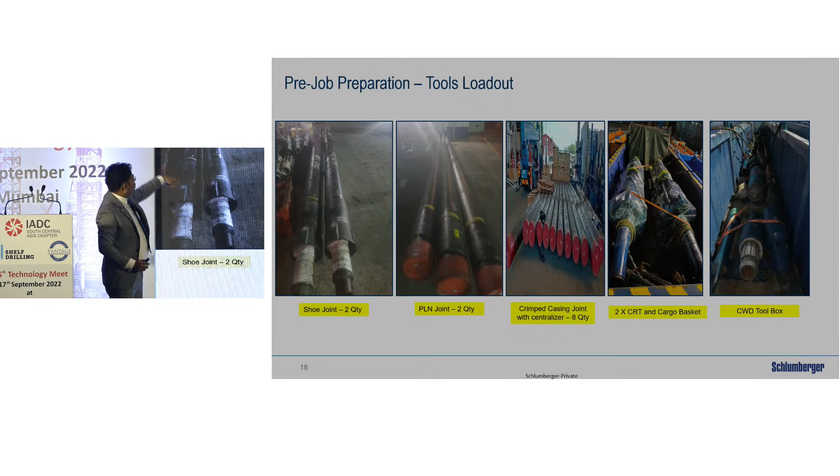However, what you get on the rig are two shoe joints with stabilization and only a pin end protruding out. The directional BHA is made up, put inside the rotary table, and made up with the casing joint—this is the only joint that will be going in. After that, all the casings come one over the other. Then we have the plug landing nipple joint, a kind of salient feature, but once we TD the well, we drop the plug for doing the cementing.

And again, all the centralizers with stabilization are put one over the other. So what I'm trying to show here is there is a complete replacement of the drill pipe with the casing, and no drill pipe is required.

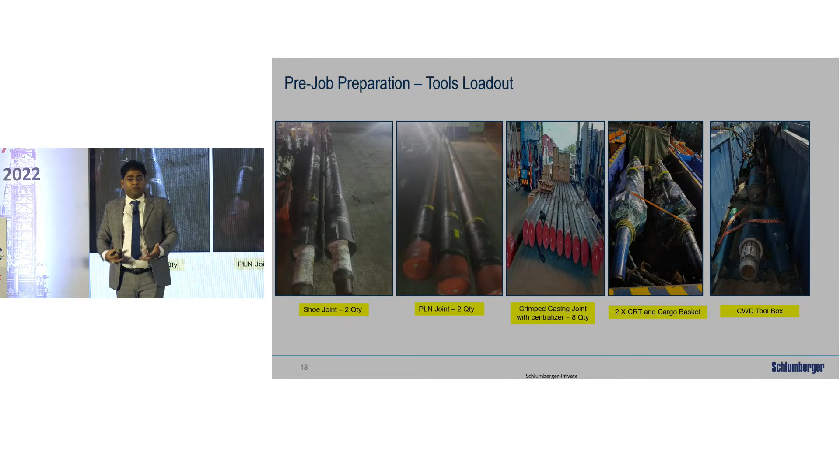Have you ever heard of racking back the casings, like 9-5/8, instead of a drill pipe? This happens. So when further looking into improving the timelines, we start to rack back the 9-5/8 inch casing on the monkey board, making changes to go even faster. A split wellhead can also ensure we have 13-3/8 inch casing with two different wells being drilled, enhancing the platform to drill more wells. Those challenges come once we have already introduced this technology.

Again, these are the complete packages that go into the job, and again, it is very important whether it makes economical sense or not.

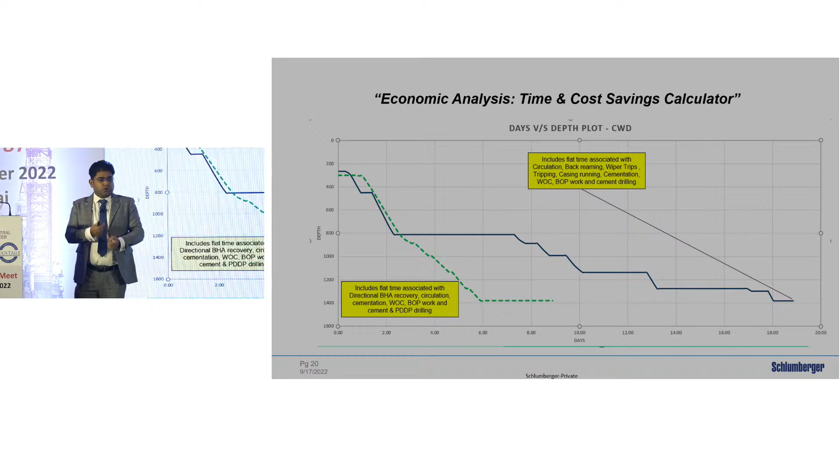So there is a digital solution where this app can be downloaded on anybody's cell, just to compare the conventional case and the casing-while-drilling case, whether it's making any changes or not. This app was created by myself, and it produces the comparison: if we drill the well conventionally, how much time it takes, versus casing while drilling, how much time it takes. You can play with the app, and a complete chart shows the cost saving and total hours taken. That kind of app allows you to plan your wells ahead, to see whether it will make sense before even going ahead with CWD. If it is not making sense, if there is no saving, there is no point discussing it.

Prior to moving on, I really wanted to thank the entire team who gave us the opportunity to introduce casing while drilling at level 2. This is a small video where I will end my presentation, but it has been a long journey, and without the support of all the executives, it would not have been possible. I can see some of the faces here and really want to thank you. It shows the journey of how long it took us to introduce level 1, and now we are talking about the next level of directional CWD.